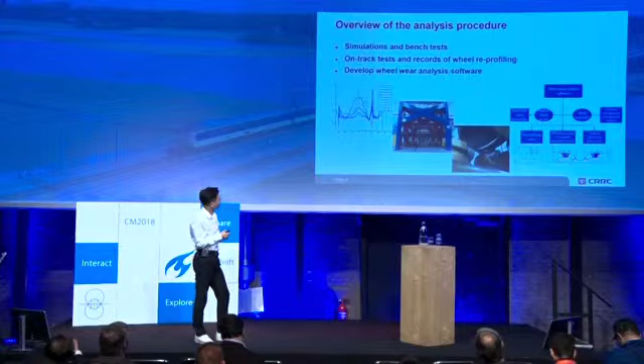Based on these facts, we must study the characteristics of wear of high-speed EMU, because it almost decides the dynamics of high-speed EMU. For the characteristics of wear of high-speed EMU, it's very difficult to predict totally by simulations or bench tests. So we conducted lots of on-track tests and collected all records of wheel reprofiling over the past several years. Besides, we developed wheel wear analysis software to utilize this data efficiently.

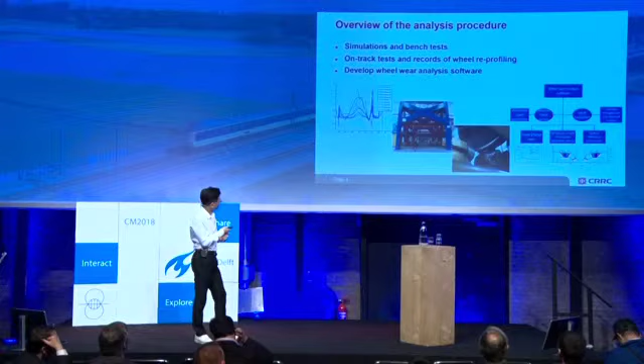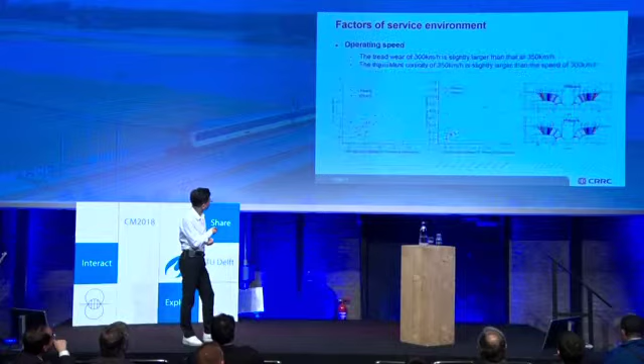Here, I will show these factors of service environment in detail. The first factor is reprofiling cycle. The test lasted for 2 years, and the EMUs operated in the northeast of China.

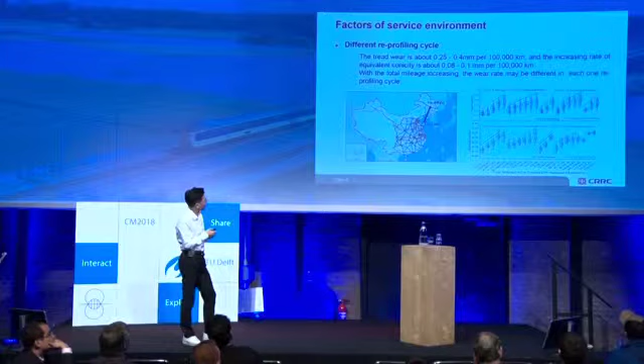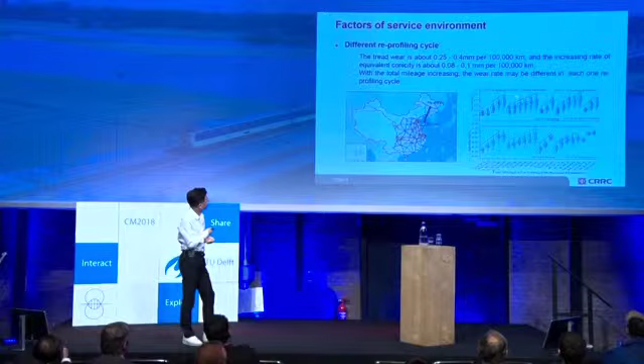The lowest temperature in winter could be minus 40 degrees Celsius. We found that the tread wear is about 0.25 to 0.4 millimeters per 100,000 kilometers, and the increasing rate of equivalent conicity is about 0.08 to 0.1 millimeters per 100,000 kilometers. With the total mileage increasing, the wear rate may be different in each reprofiling cycle.

The second factor is operating speed. We chose 2 kinds of operating speed for the EMUs which operated on the same line.

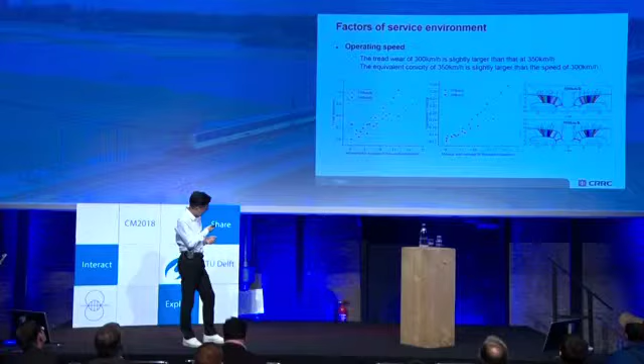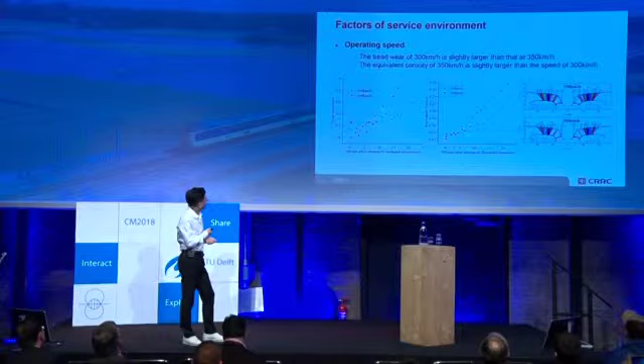The results showed that the tread wear at operating speed of 300 kilometers per hour is slightly larger than that at 350 kilometers per hour. And the equivalent conicity at operating speed of 350 kilometers per hour is slightly larger than that at 300 kilometers per hour.

The next factor is the different seasons. According to the wheel reprofiling data of 30 EMUs which operated with the same wheel profile, the results show that the tread wear from May to September is slightly larger than in other months. In other words, tread wear in summer and autumn may be slightly larger than in spring and winter. Similarly, the equivalent conicity in summer is larger than in other seasons.

For the EMUs operated in the north, we found that the equivalent conicity of the motor bogie is larger than that of the trailer bogie.

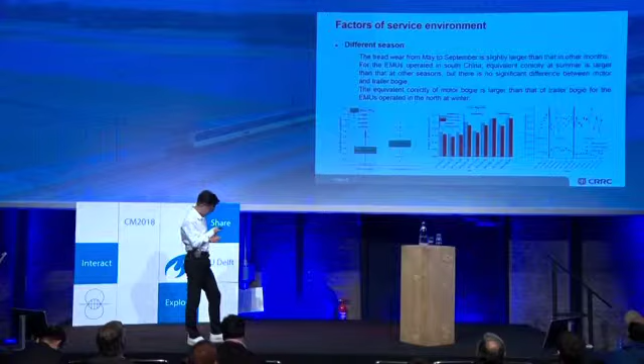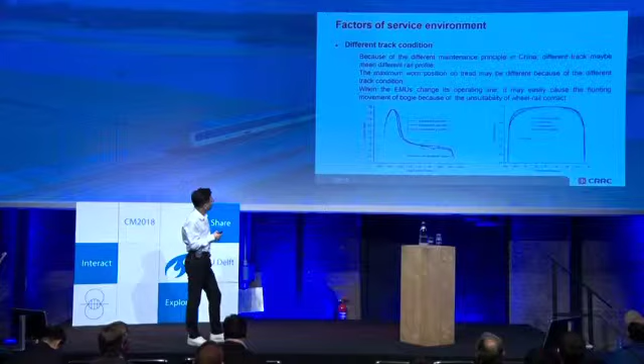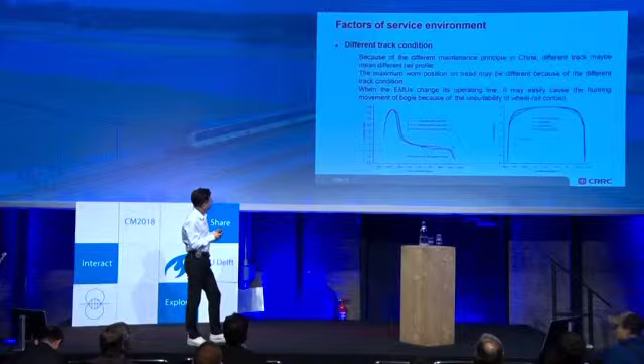The next factor is different track condition. We must realize that different tracks may have different rail profiles because of the different maintenance principles in China. This difference may result in different maximum wear positions on the tread.

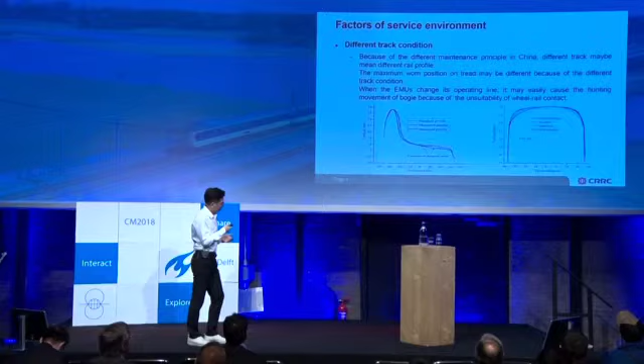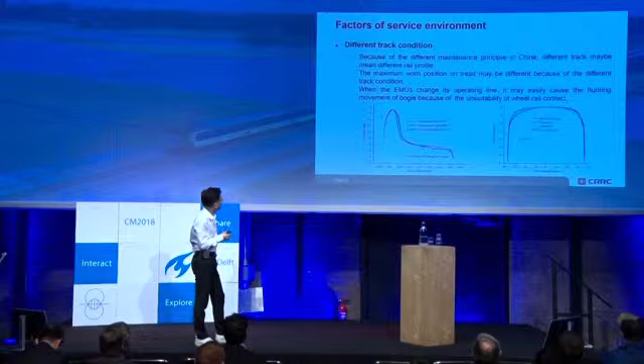It's found that the real rail profile may be higher or lower than the standard profile. The former and the latter occur due to before grinding and after grinding respectively. For the two measured profiles, the maximum wear position is different.

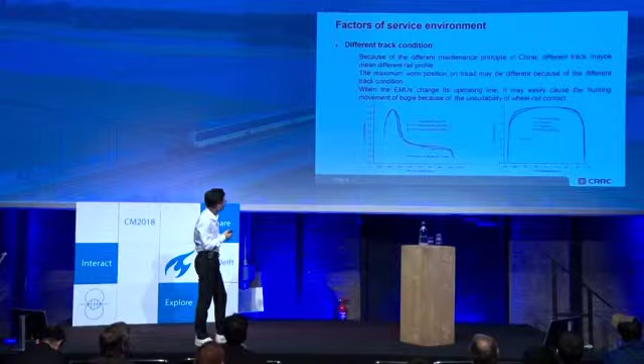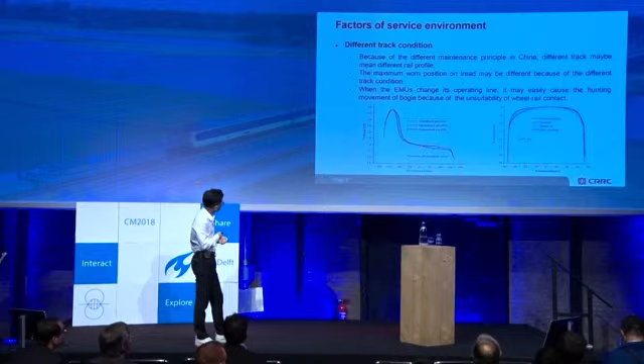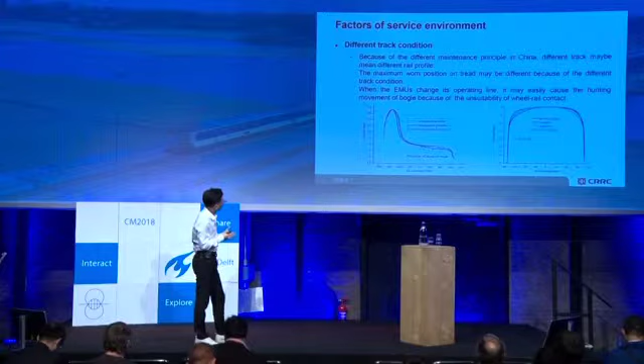One maximum wear position locates outside the nominal rolling radius as depicted in the blue curve. Another position locates around the nominal rolling radius, as described in the red curve. Besides, we found that once the EMUs change their operating line, it may easily cause hunting movement of the bogie because of the unsuitability of wheel-rail contact.

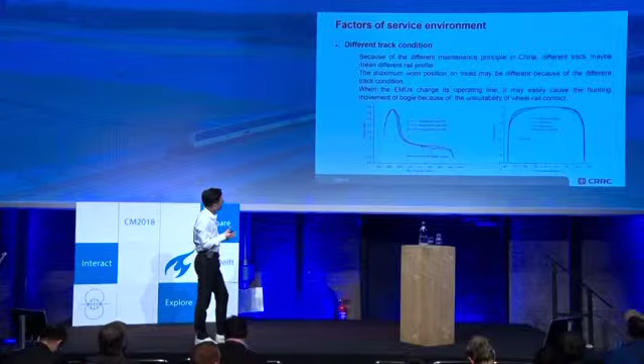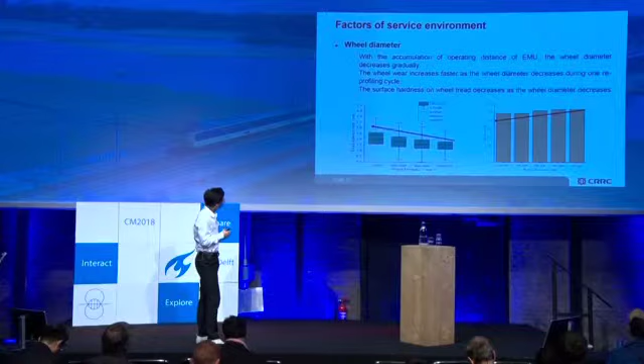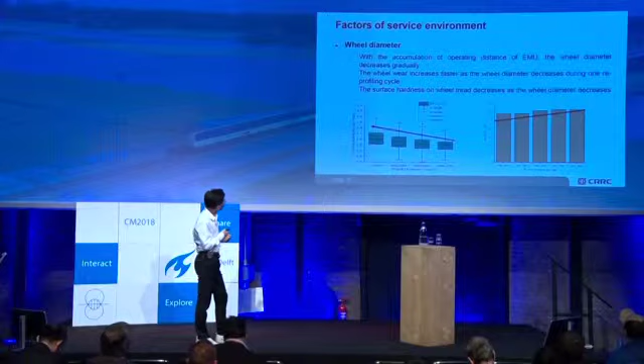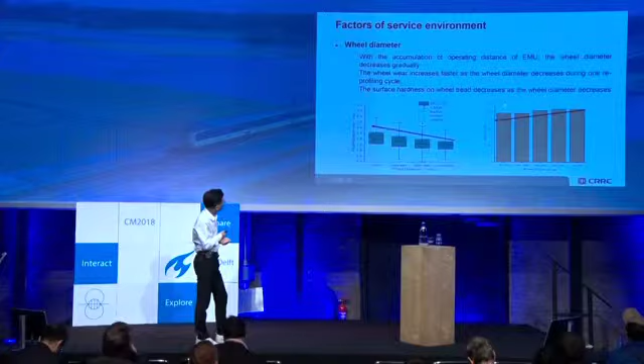The last factor is wheel diameter. After tracking different EMUs which operated in different lines, we found that the wheel wear will increase faster as the wheel diameter decreases during one reprofiling cycle, with different wheel diameters. And the surface hardness on the wheel tread decreases as the wheel diameter decreases.

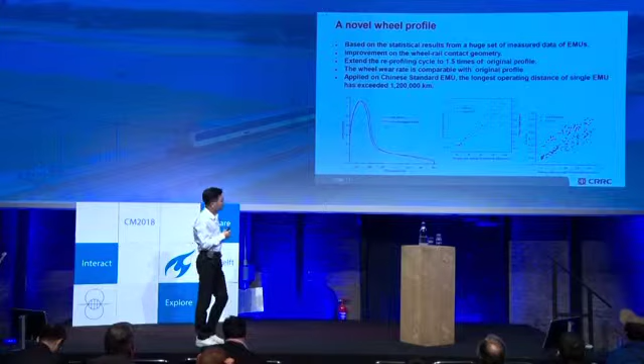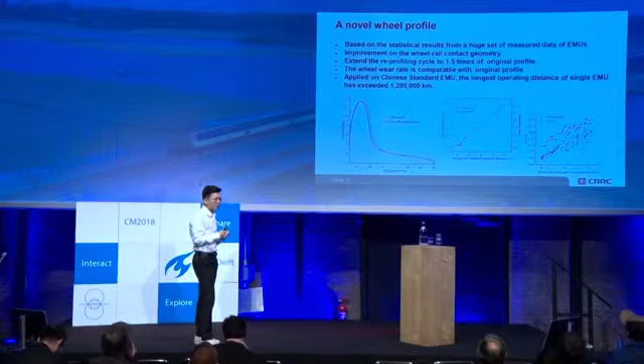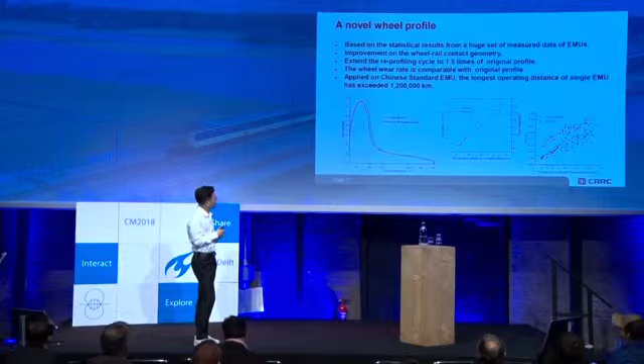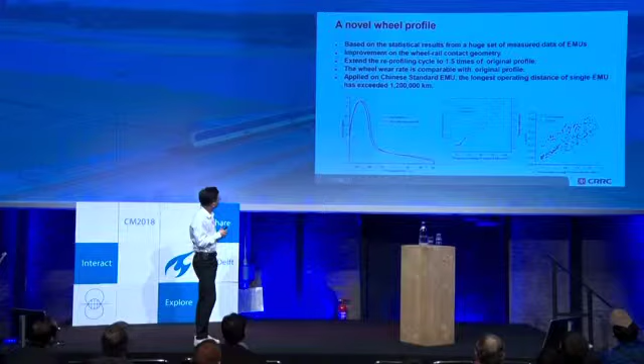The last part is a novel wheel profile. Through analyzing those massive data, our novel wheel profile has been put forward by us. It has been applied on Chinese standard EMUs since 2017. Its behavior has demonstrated that it could improve the wheel-rail contact geometry and extend the reprofiling cycle to 1.5 times of the original profile, and the wheel wear rate is comparable with the original profile.

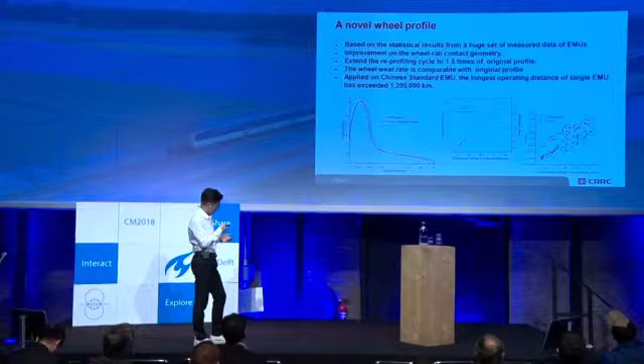Okay, my presentation is over. Thank you for your listening. You give the real data of the wheel. Okay.

Any question for this paper? Any question? Yeah. Thank you for the presentation.

Which was the reason for changing the wheel profile, or which was the reason for reprofiling the wheels before the change of profile was done? You mean the reprofiling data? Yes, you have changed the wheel profile. So why did you change, or what was your goal with this profile? Why did you choose this shape of the profile?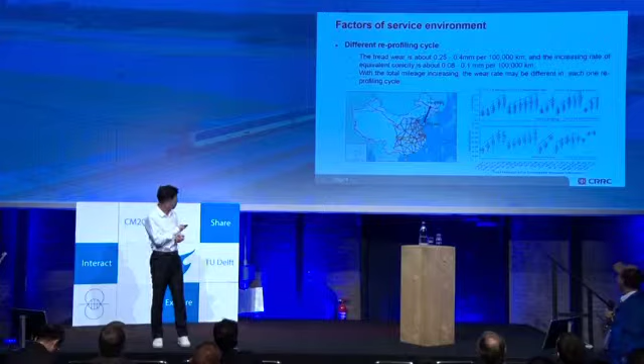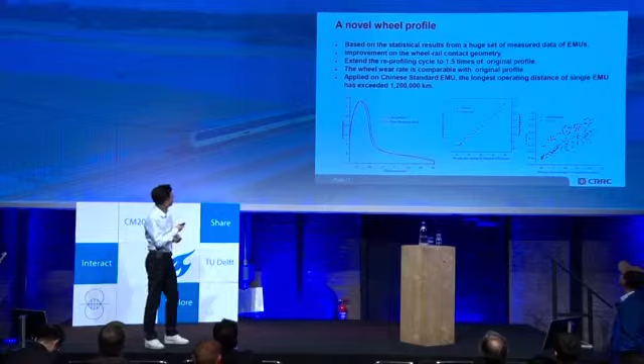In the last slide, I think. Is this? No, the last one, I think. Okay, here? No, the last of the presentation. Okay, the next. This one. Okay, there. I understood that you chose the red wheel profile. Okay, I know. You mean they extend the reprofiling cycle to 1.5 times of the original profile?

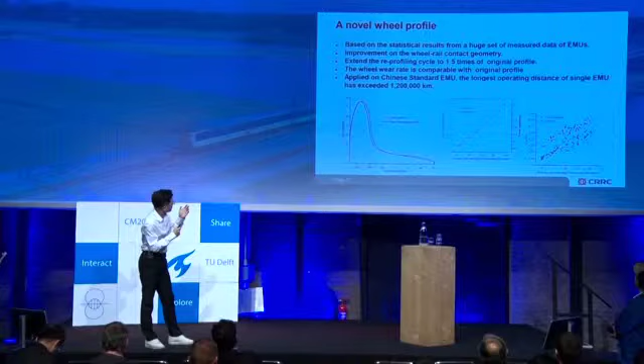Okay. Here maybe I don't show the evidence it's actually extending the reprofiling cycle because the conclusion is based on our operating data. This I don't show, but you got it with this profile by changing the wheel profile from the black one to the red one. The red one to black one, yeah.

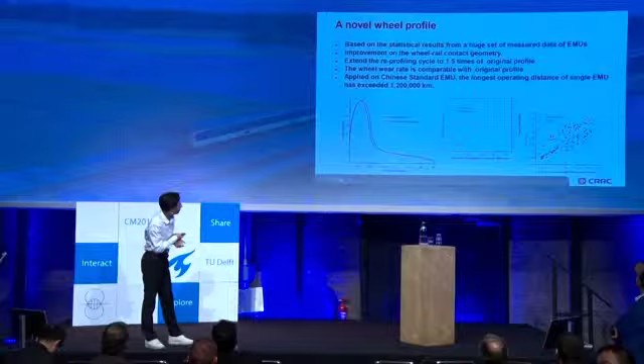From the black to the red one. Yeah. No, the red one is the new profile. Here. The black one is a new design, and the red one is original. Hello, okay.

And I can explain it. Why? Because in our operation, we faced some dynamic problems like hunting, like bogie hunting, because the original profile is not suitable for the different rail profile in the maintenance cycles. So we have to design a new wheel profile.

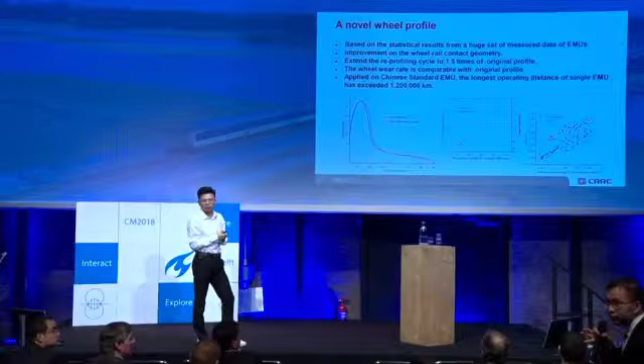Okay, understood. Thank you. Okay, thank you. Okay, we still have 1 minute. Okay. 1.5 minutes. Yeah. Okay.

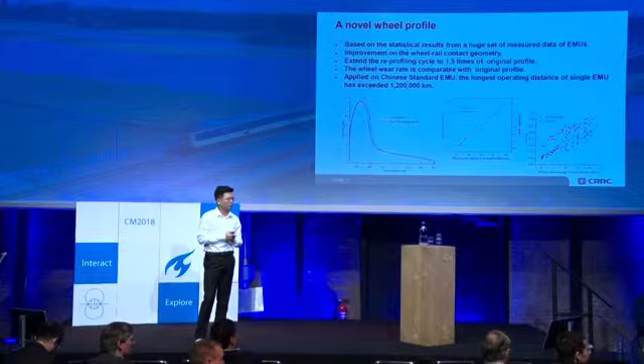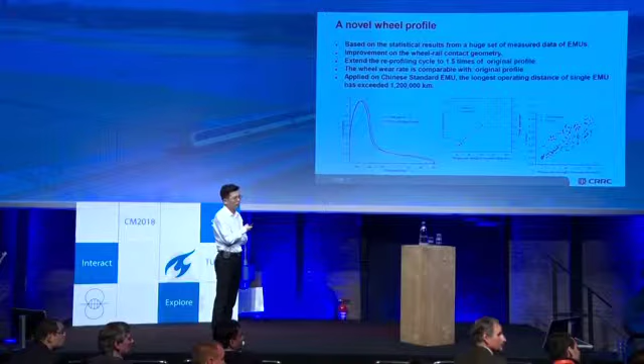I have one question about profile design also. It was a good question about new design and old profile. When you designed your new profile, have you considered curvature of the track, or also have you considered, do you have different rail profiles for curves? Because what is your optimization technique? You use one profile for tangent track rail profile, and you use different profiles for curvature.

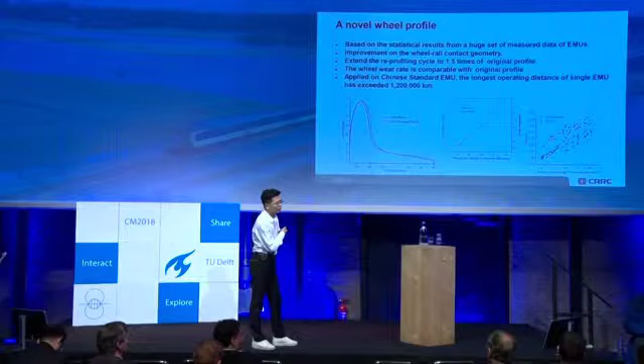For curved track. For curved. So how do you optimize this profile?

Okay, you mean the new designed profile? Yeah, a rail vehicle always has a wheel profile. It's no problem. So you install wheel profile, or not install, you install wheel with wheel profile. My question is, because on railway track we use different profiles for tangent track, and we use different rail profiles for curved track. So in your case, when you make a decision on your profile, how was track location considered, or something like this?

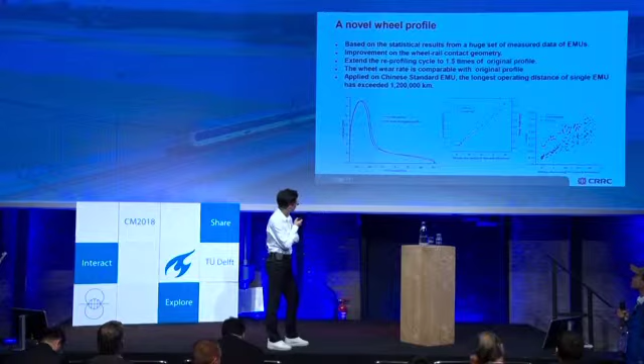Okay, I know, what's your meaning, but the new designed profile is not completely based on that, maybe there is some experienced factor in this design.

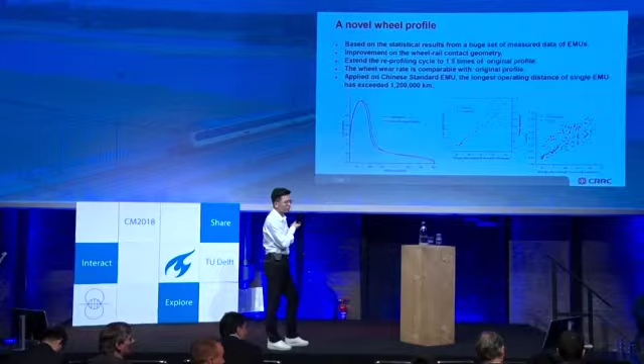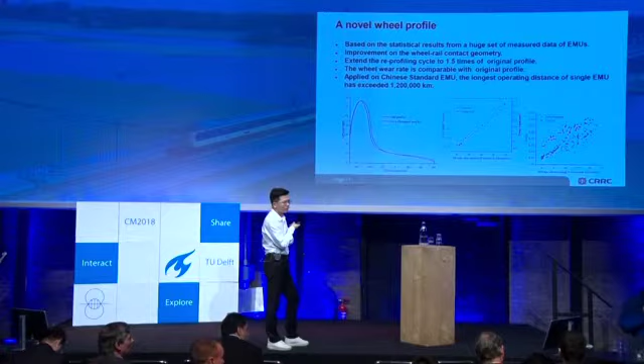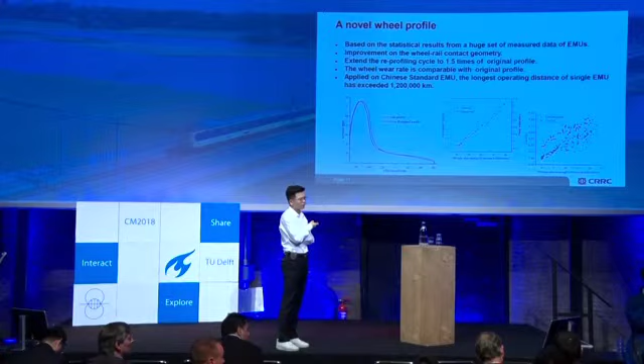No, with all you consider that, I think this is for high-speed train in China. Yeah, so for high-speed trains, the curvature is very large, similar to the straight track. You still use different profiles? No, same profile on the curve track and on tangent track. The same one for the straight track and for the curved track, because the curved track is very large, it's similar to the straight track.

This is the answer. Okay.